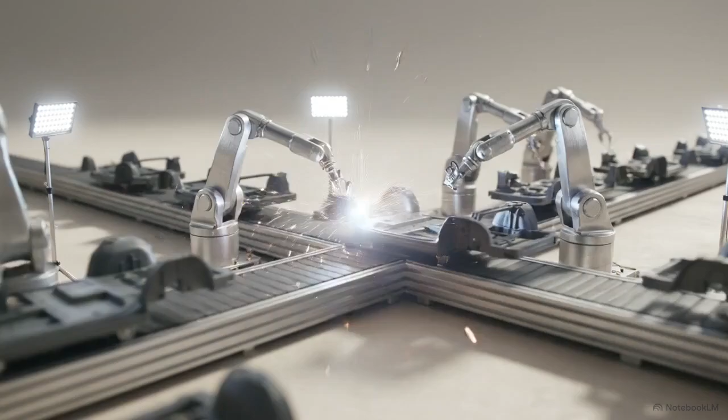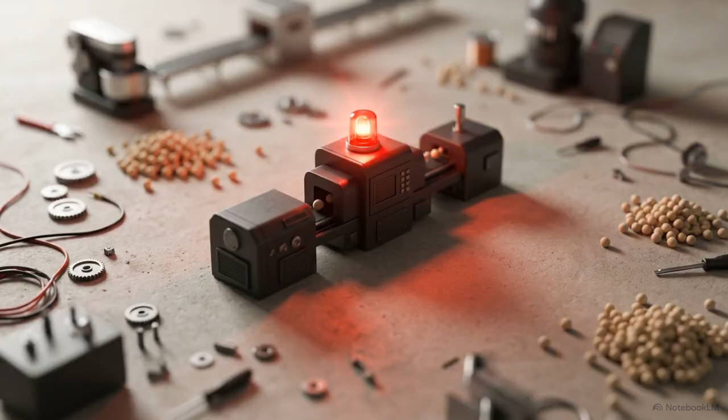Imagine the marketing team achieves a massive win. They secure a record-breaking order, revenue targets are shattered, and the company prepares to scale. But down on the factory floor, that sudden demand triggers a crisis. Machines break down without warning, defect rates spike, and the staff is forced into endless, exhausting overtime shifts just to keep the line moving. Ultimately, deadlines are missed, and the client cancels the order.

This phenomenon is known as death by success, a scenario where an unmanaged back-end operational system collapses under the weight of front-end victories. Executives frequently misdiagnose this problem because they fall for the illusion of busyness.

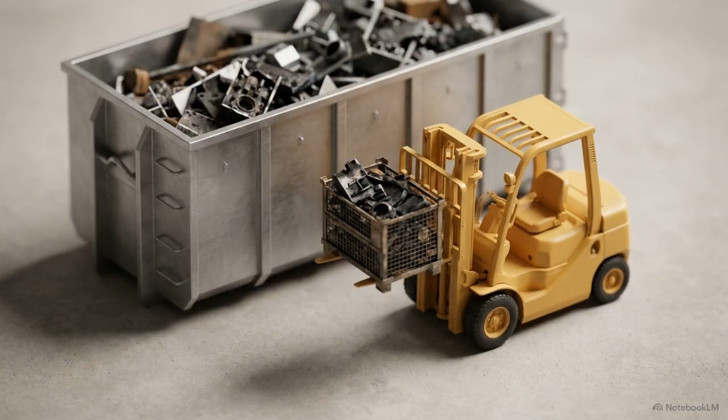They walk onto a loud, highly active factory floor, see constant motion, and assume they are looking at a highly productive environment. But activity does not equal throughput. Those running forklifts might simply be moving defective parts to a scrap pile, and those loud machines could be running empty while waiting for materials.

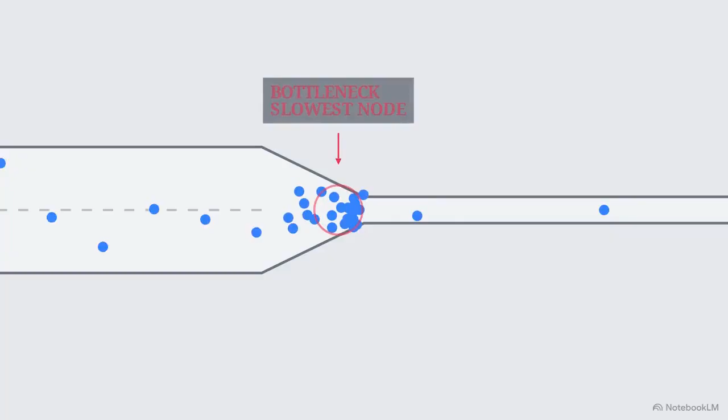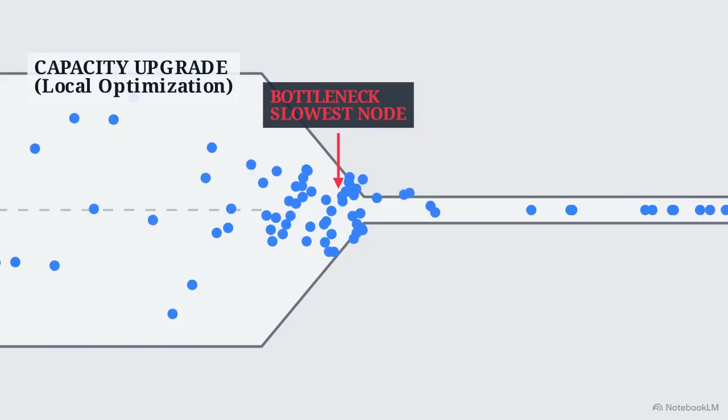To understand actual capacity, we have to look at the system's constraint. The theory of constraints dictates a simple physical law: the maximum speed of your entire factory is strictly governed by its absolute slowest operational node. Upgrading any part of the production line that is not that core constraint will not increase your total yield. It is mathematically guaranteed to generate massive waste.

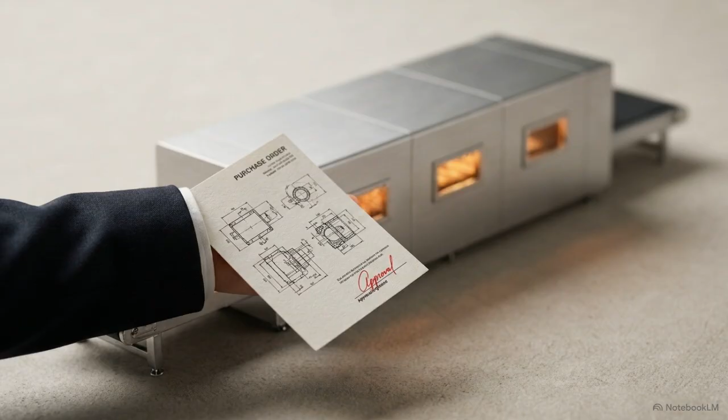Consider the case of Siam Master Bakery, a B2B supplier that found itself buried under a critical backlog of industrial butter croissant orders. Management's immediate reactive solution was to request 10 million baht for a brand new tunnel oven. They assumed that because baking was the final step, the oven was the reason they were too slow.

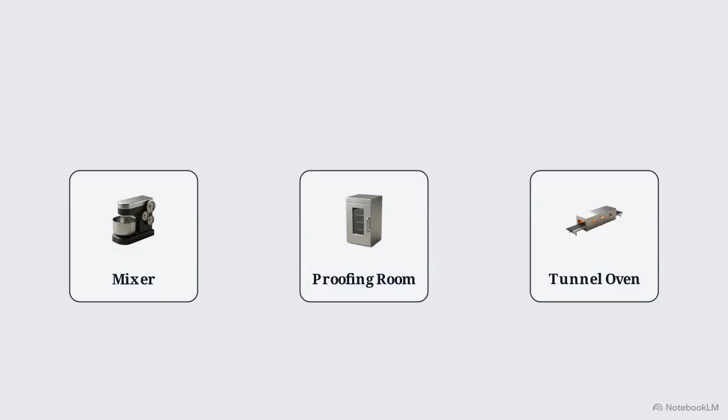This diagram maps their actual production process. The sequence is straightforward: the mixer prepares the dough, the proofing room lets the yeast rise, and the tunnel oven bakes the final product. To find the true bottleneck, we don't look at the machines themselves.

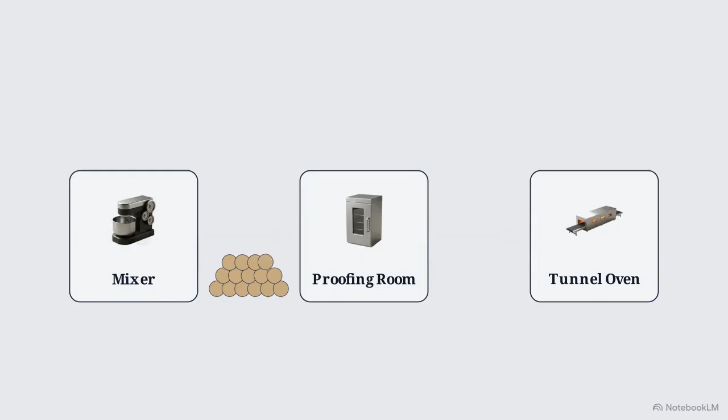We look for the physical evidence of delay, a mountain of work in process. The raw dough was accumulating entirely in front of the proofing room. Because the proofing process was so slow, the existing tunnel oven was continually starved for material, sitting empty and idling while burning expensive fuel.

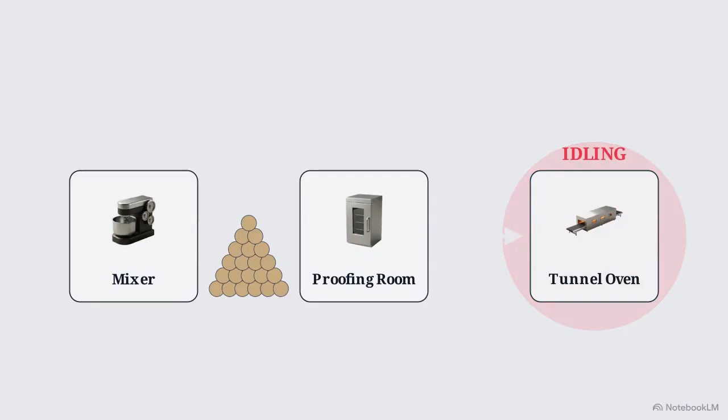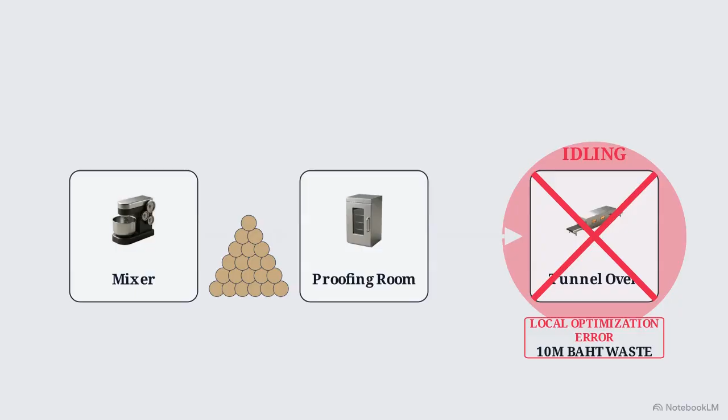This exposes the danger of local optimization. Spending 10 million baht to make the oven faster would accomplish nothing, because the oven was already waiting on the true constraint. Identifying the actual systemic bottleneck is the only reliable way to prevent fatal capital expenditure mistakes.

Once you locate the physical bottleneck, you must measure the temporal math governing the system. This top timer represents takt time, the precise, steady rhythm at which customer demand pulls product out of your facility. The bottom timer shows cycle time, the actual amount of time it takes your factory floor to physically complete one unit of product.

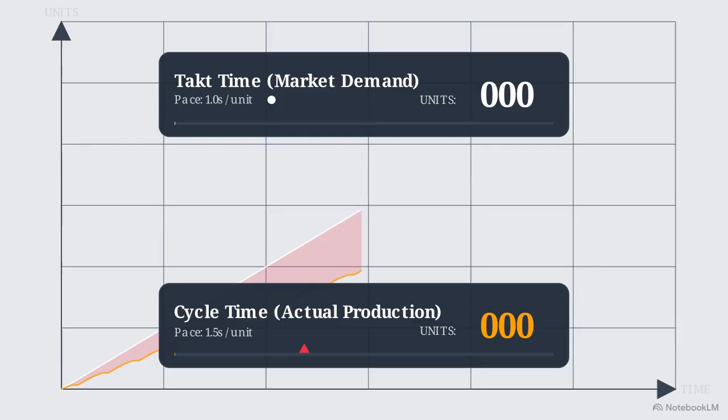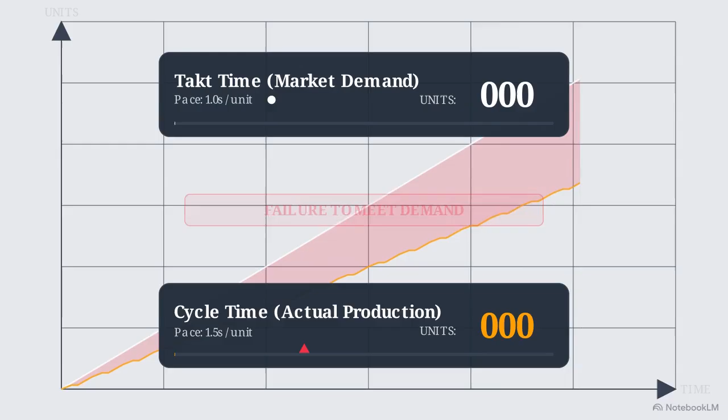The relationship between these two numbers is a rigid mathematical law. If your cycle time operates slower than your takt time, the factory will inevitably fail to meet market demand. When managers ignore this math, the human cost is severe: standard operating procedures fracture, workers burn out from forced overtime, and the entire system degrades.

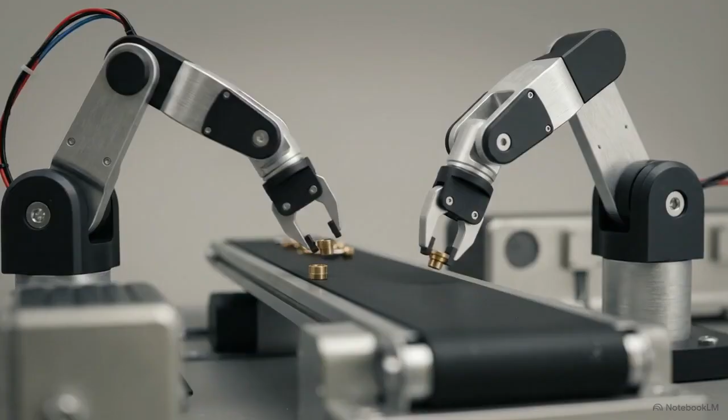Line balancing, the engineering practice of forcing your cycle time to perfectly match your takt time, is a non-negotiable requirement for operational survival. To monitor this balance, industrial engineers rely on OEE, or Overall Equipment Effectiveness. This dashboard shows how the bakery scored a failing 45% by measuring 3 specific variables.

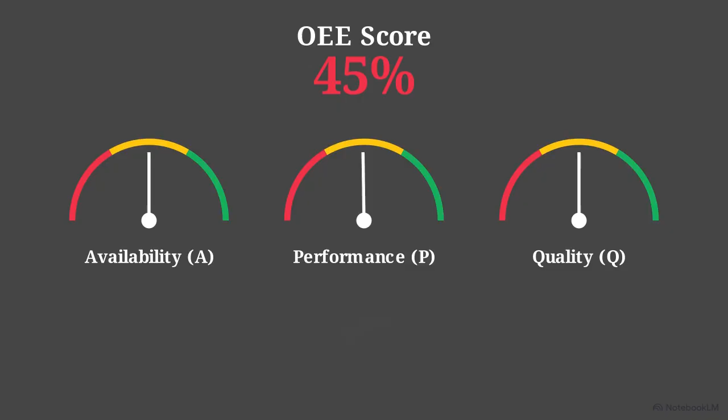First, the performance variable was tanking because the expensive tunnel oven was constantly forced into microstops, idling while it waited for the slow proofing room.

Second, the quality score dropped to 80%. Those erratic microstops caused inconsistent oven temperatures, burning the croissants and generating massive amounts of scrap.

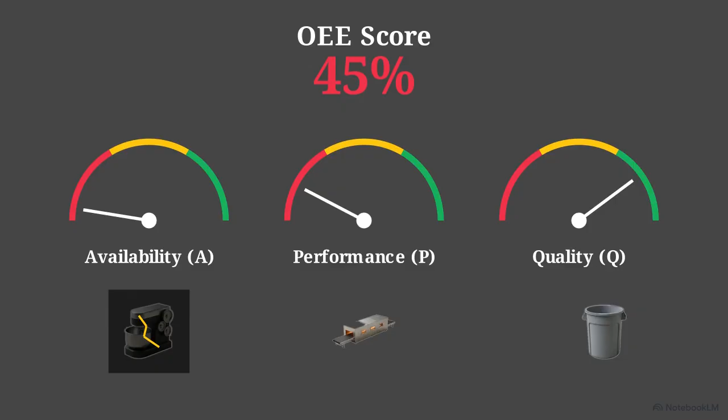Finally, availability was decimated. The dough mixers were chronically breaking down due to a lack of routine maintenance, causing unplanned downtime across the line. The intervention began by modifying the proofing room's temperature curve, accelerating the yeast activation to immediately

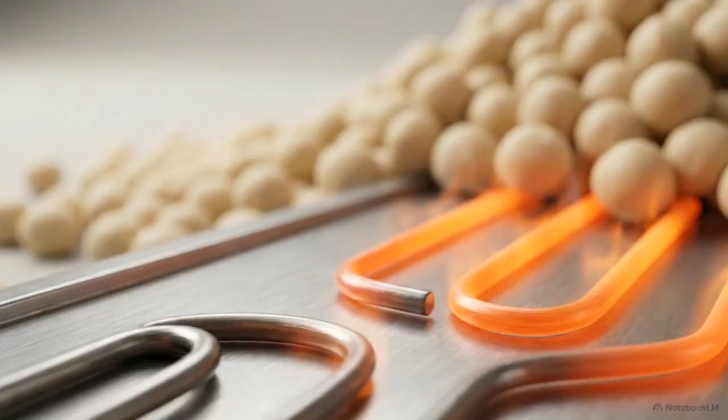shatter the primary bottleneck. Next, they deployed a low-code computerized maintenance management system. This empowered line workers to log machine degradation instantly, scheduling repairs before the mixers actually snapped.

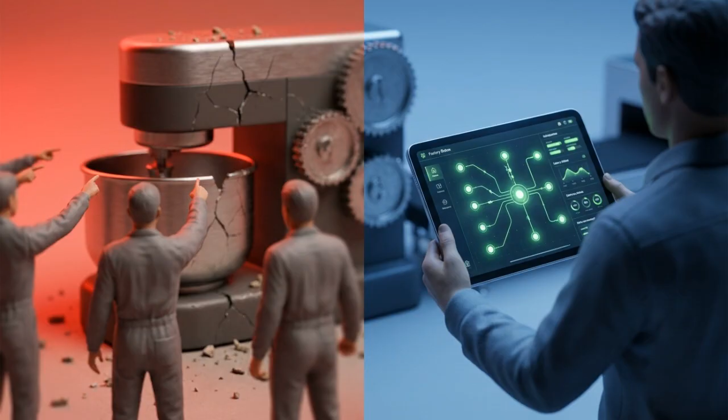By replacing subjective floor observations with hard digital sensors and the OEE formula, management shifted from reactive panic to a state of predictive control.

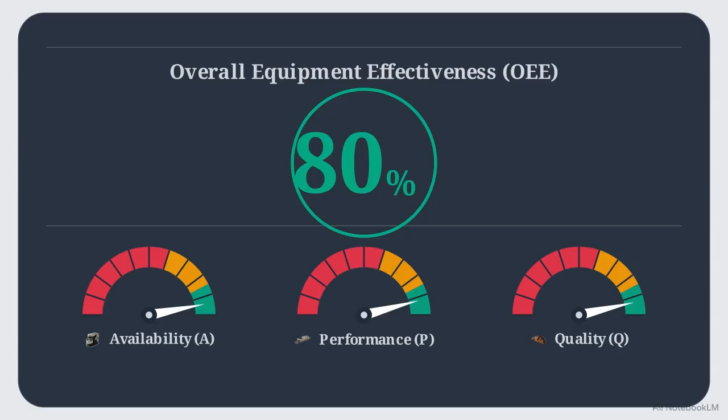Returning to the OEE dashboard, the results of these interventions are clear. Siam Master Bakery doubled its production capacity and pushed its efficiency to a world-class 80%, all with zero capital expenditure on a new oven. This maps to the first rule of the operations diagnosis checklist.

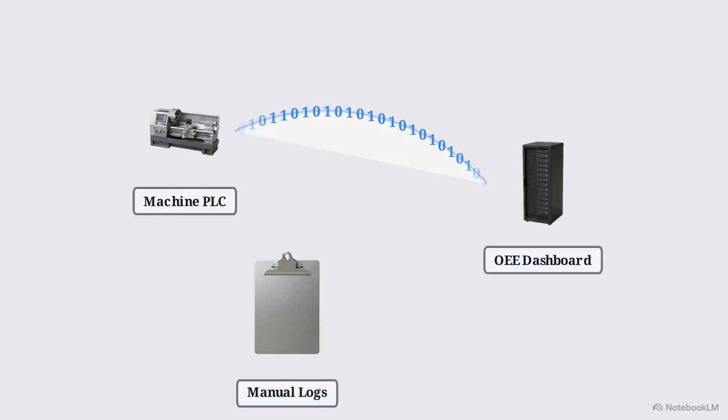You must mercilessly locate the true physical bottleneck before spending a single dollar. Second, track your OEE using direct machine PLC data, avoiding paper logs that can be manipulated. Third, use SMED techniques to drastically minimize setup times and eliminate the urge to overproduce. Fourth, clear physical motion waste from the floor to keep standard work fluid. And fifth, shift your culture entirely to preventive maintenance.

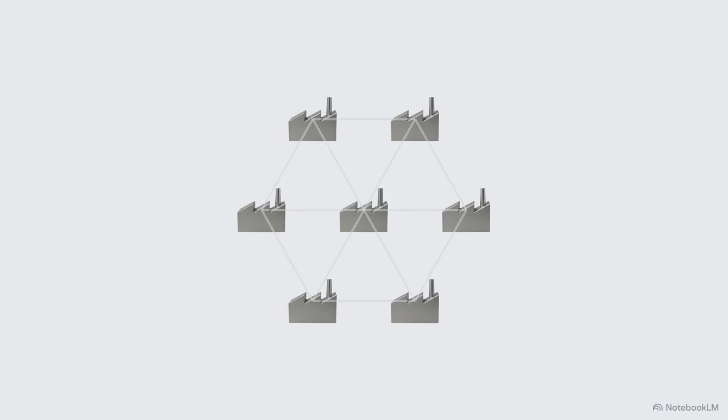But there is a vital caveat. The most advanced IoT sensors and maintenance software will collapse if the workers operating them lack systemic understanding or the morale to maintain the standard.

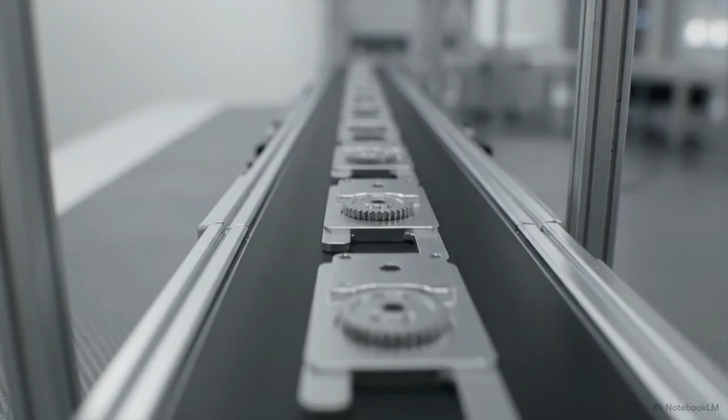Taiichi Ohno, the father of the Toyota production system, understood the intersection of human perception and mechanical efficiency better than anyone. He warned that the worst kind of waste is the waste we cannot see. True optimization is not about forcing human beings to work harder. It is the rigorous engineering of a system where work flows flawlessly, uncovering hidden friction and turning it into pure profit.